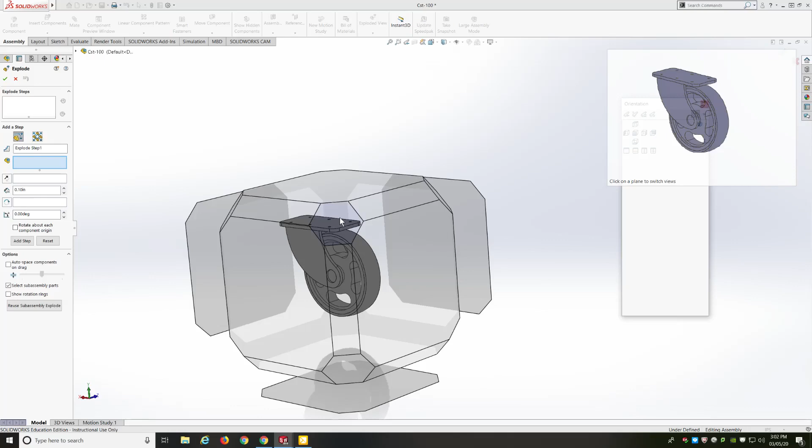Now, before you start exploding, the one thing you should do is hit the space bar and put it in an appropriate isometric view. If you don't put it in an isometric view, you're not going to know exactly what the spacing looks like when you put this on paper. We're preparing this for paper in an isometric view because that's the view SOLIDWORKS uses to show or explain an exploded state. So you have to put it in an isometric view to begin.

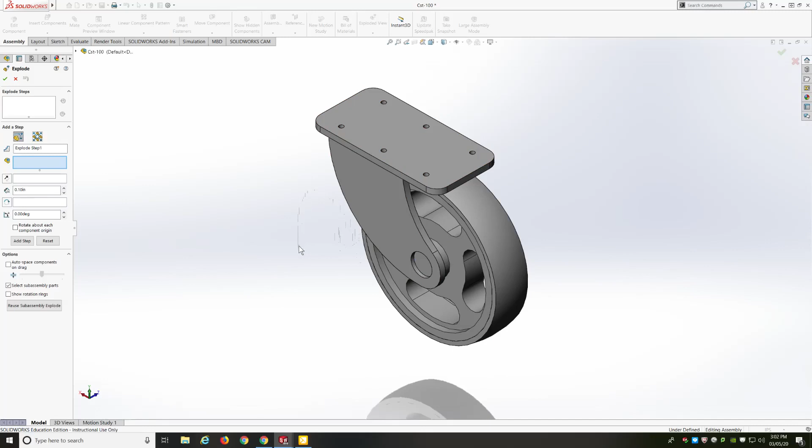All right, I'm going to zoom out a little bit. And basically the way this works is you have to be very careful because SOLIDWORKS will easily kick you out of explode mode. So you have to pay attention to what's going on the left side here to see if it kicks you out or not, based on any additional clicks or a wrong move or something like that.

So how do we explode this? All right, I'm going to left click once, and that will highlight my mount plate, and then it gives me arrows that I can then grab, and it highlights, and I can move it in that particular direction.

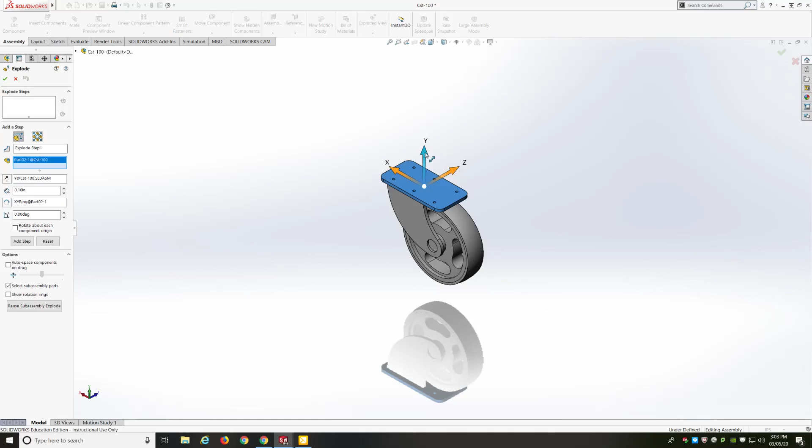So I can grab it in the Z, I can move it in the Y, I can move it in the X direction. In this case, I'm going to grab the Y arrowhead, left click and hold, and drag upwards. Let go. Okay.

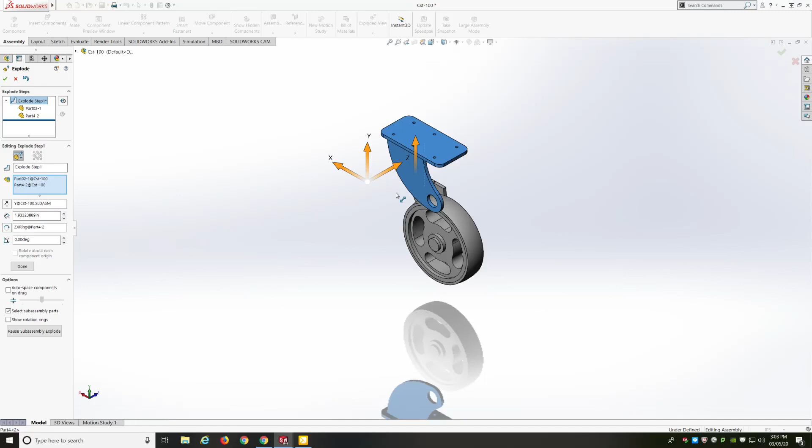After that, I'm going to grab the left. Whoops, that wasn't supposed to happen. See, it likes to do weird things. I'm going to Control Z, undo. And let's try this again. I'm going to left click. Nope, Control Z. Okay, let me left click out in space. That doesn't do anything. Let me undo.

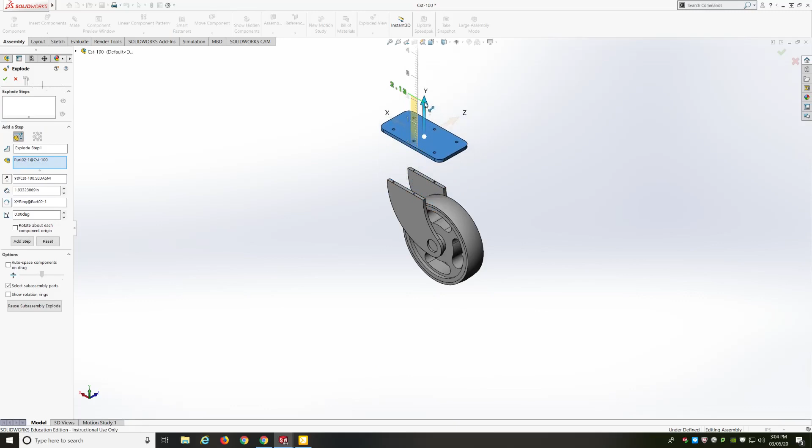Try it one more time. Pull this up. I'm not going to move my mouse. I'm going to right click. That's better. Okay, so we got to make sure that after each step we right click and don't move our mouse.

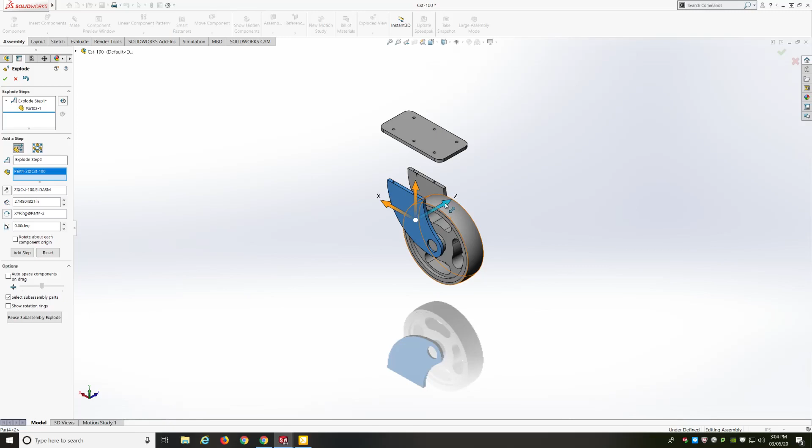So I'm going to left click to select my side mount, and I want to move it in the negative Z direction. So I'm going to left click on the Z arrowhead, and I'm going to move it out. I'm not going to move my mouse, and I'm going to right click.

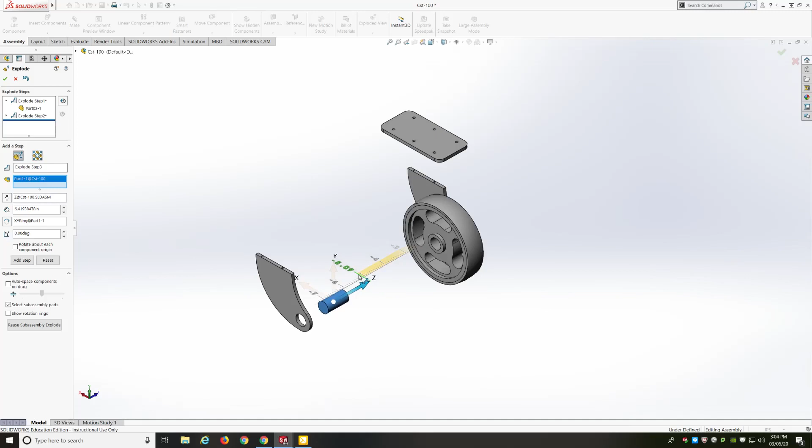Then I'm going to take the axle, and same thing, move the Z axis in the negative direction, and I want to space it so there's a little bit of a gap in between each item. Right click. Then the wheel. Move it in the negative Z, making sure that there's a little bit of space. Right click to confirm. Okay, there's a little bit of space between here and the edge.

I'm going to move this in a positive Z.

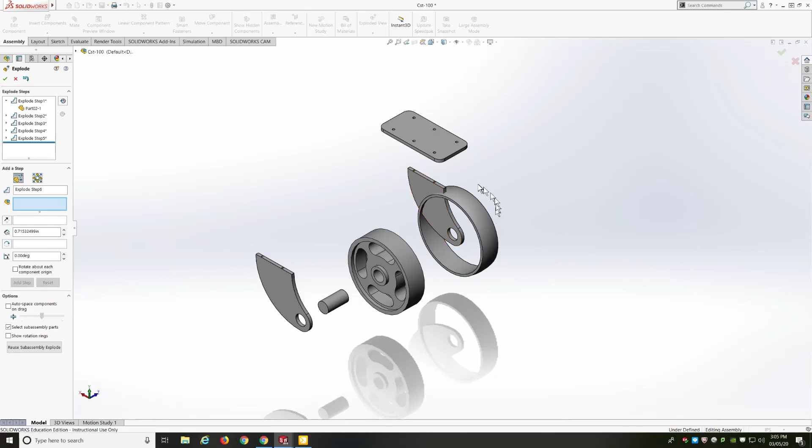Okay, I know it's cutting through that side plate. That's okay. I'm going to right click to confirm, and then select that side mount plate and move it in a positive Z to make sure it's away from everything else. Right click... well, this time I'm getting this kind of box because I moved my mouse. So I'm just going to click OK.

What happened now is it kicked me out. I can tell by looking at this. When it kicks you out and you try to go back into the exploded view, you're basically going to be creating a new configuration. So this is where you have to be careful, and the way to remedy this... I'm almost 100% good with this. I would like to move my side plate maybe back over and then up a little bit.

But this is looking pretty decent. So what I'm going to do is go over to the feature management tree, and there's a series of little tabs we haven't really played around with before. The third tab is the configuration manager. If I click on it, we have my assembly configuration and then a default. If I hit the drop down for default, it gives me the exploded view configuration.

A double left click on exploded view brings my configuration back to the assembly view. If I double left click on the gray exploded view 1, then it explodes it based on the steps I took to explode. So one more time, double left click brings it together, double left click in the same spot gives me the exploded view.

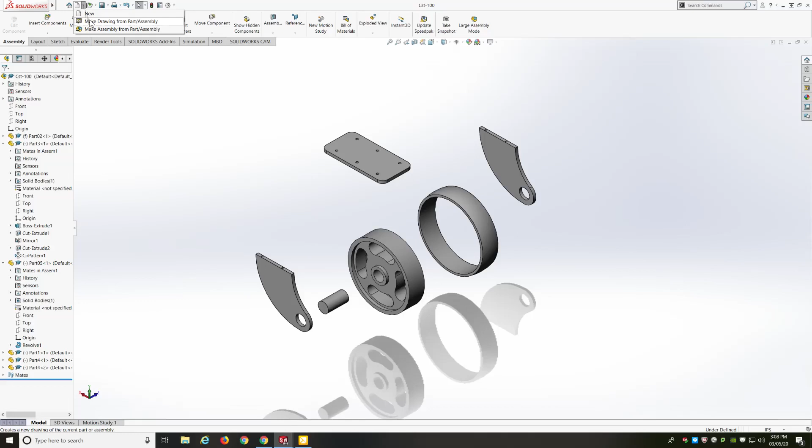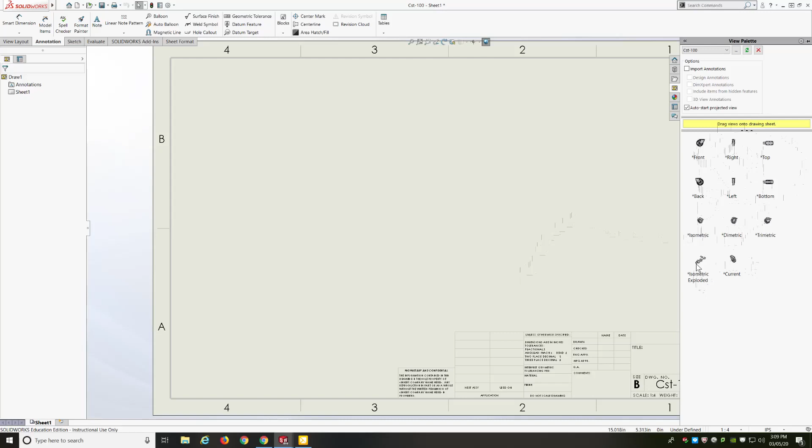Just like starting a regular drawing detail, I'm going to go up to New, make drawing from part or assembly, just like we did with regular parts. It's telling me about the templates, I'm going to hit OK. B, landscape. Okay, and in my palette view, we can see that there is the assembled view, right? The assembly front, the right, the top, the bottom, isometric views, a current view, and an isometric exploded view in my isometric setting.

So I'm going to use the isometric assembled view, pull that out. I'll pull it out right here. I'm going to go back into my view palette and choose the exploded isometric view and let go.

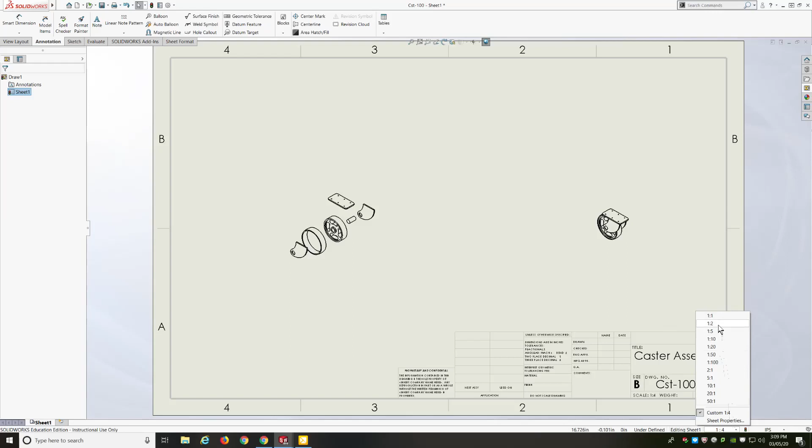At this point, I'm going to change the scale of the sheet. So I'm going to left click an empty space. Shortcut version is down at the very bottom. I'm going to change this to 1:2. See how big it gets. 1:1 maybe. Okay, might be a little cramped at 1:1.

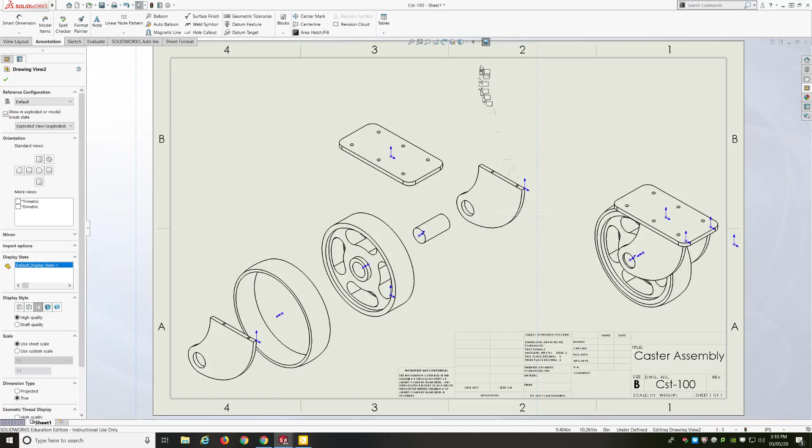Let's see, make sure I grab the right box. Okay, so I think with the amount of parts, this might work out well. I want to again make sure that all of these little origin points are hidden. So I'm going to click on the little eyeball, select View Origins, and turn that off.

The next thing I'm going to do is select the isometric view, and I'm going to change it to maybe the colored version, just to make a noticeable difference between the two files. The exploded assembly view should always be in a line drawing or hidden line invisible. This is a good view. It should never be colored, because we want to make sure we see all the different parts.

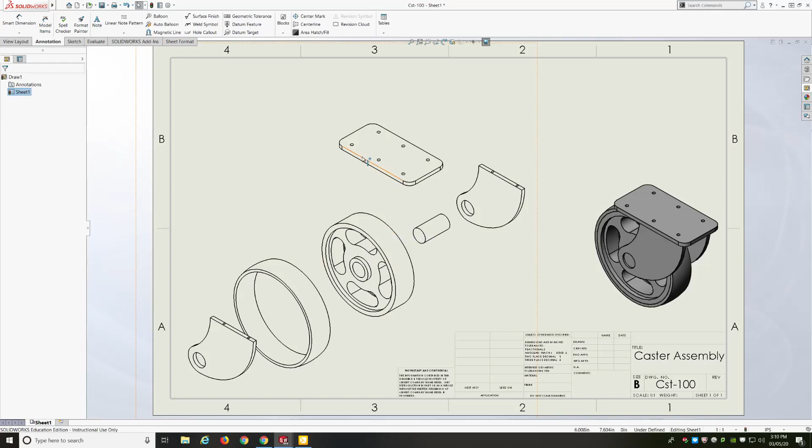So the next step is to create balloons. Up in the annotation portion of the drawing file, I'm going to create a balloon.

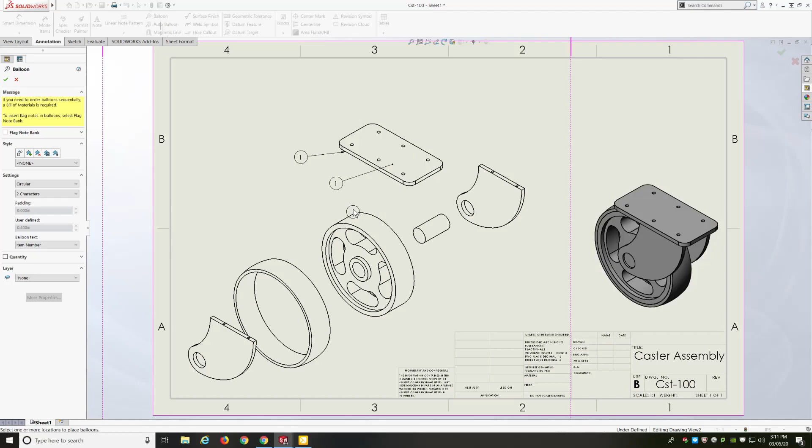And the balloons, you'll notice that if I touch the edge, it gives me an arrowhead. And then I'm going to drag away, left click to place a number. It's going to number these automatically based on the order that they were brought into the assembly file. You'll also notice that if I hover over the face and put in a balloon, you can see there's a difference in what the arrowheads do.

If you select an edge, it gives you an arrowhead. If you select a face, it'll give you a dot. That is per standard. So I'm going to finish. I'll erase one of these in a moment, but I'm going to continue on.

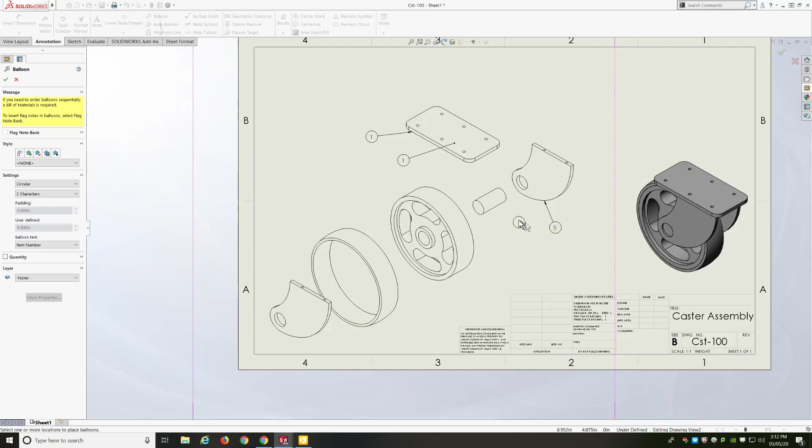By selecting the face here. I'll change that in a moment, that one should have been an edge rather than a face. Do face here, do the face there, and finally do the face there. So I'm going to right click to finish.

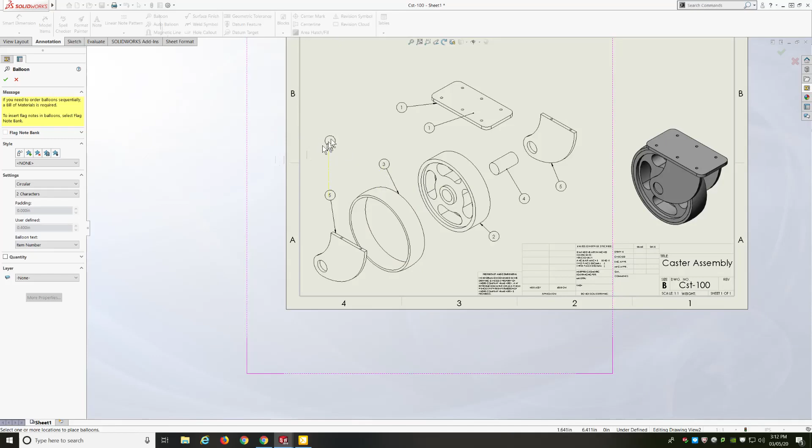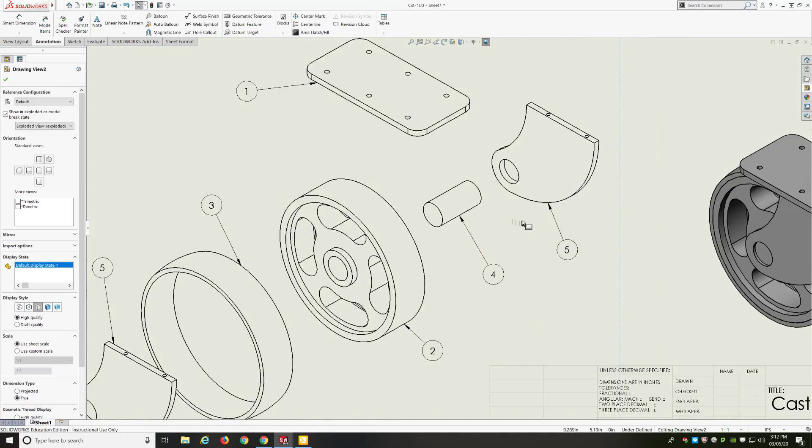Green check out of balloon. Now I can go back in, choose whatever balloon I want, hit delete, and then also select those little endpoints and make any readjustments if I need to. So this automatically changed from a dot to an arrowhead, and I have all my parts labeled.

The last part is to be able to create a table. So I'm going to go to tables, and I want to create a bill of materials. I'm going to select bill of materials, and it gives me a little warning saying select the drawing view to specify the model for creating the bill of materials. So I'm going to left click on this view. Once I do that, it gives me a whole bunch of options.

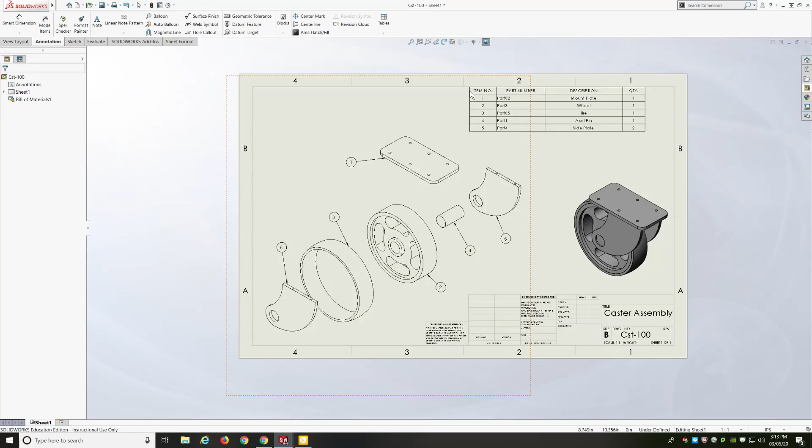I don't have to worry about anything, I'm just going to green check, and attached to my mouse when I move over my view will be a bill of materials. So I'm going to bring it up until it snaps to the top line, left click to place it.

You'll see that the item numbers, item number 1, 2, 3, 4, 5, match what these are. So item number 1 is my mount plate. Item number 1, I have it labeled as part 02, and the description is a mount plate. All of that automatically comes in. The side plate, you'll notice it automatically recognizes that there are 2 of those.

Now, one thing that's missing in an actual drawing, I would probably still like to include materials. So we can right-click in the headers, and we could insert a column to the right or to the left. I'm going to throw it into the right.

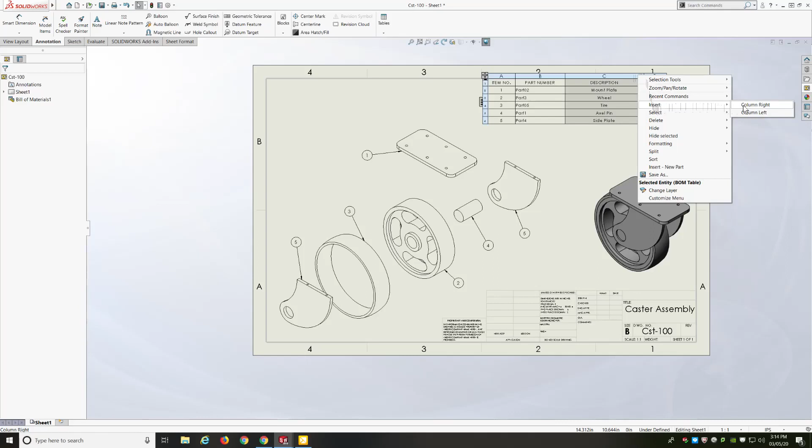We do have some options for custom property names or some other information, and it's looking at a lot of these automated links. Much of that we don't really have defined. So I'm going to try to just put in there.

Just left click out of it, double click in the cell, make sure I do it in all caps, and put in materials. At that point I can readjust my bill of materials. And then this I could fill in automatically by double left clicking into the cell, and whatever material was made for that part, I can do that.

Same thing with the column headers, like letter B. I want to make sure that this is center justified, make sure that everything is nice and neat. And just like using Excel, we can modify some of the information here so that we don't take up as much space with all of this information.

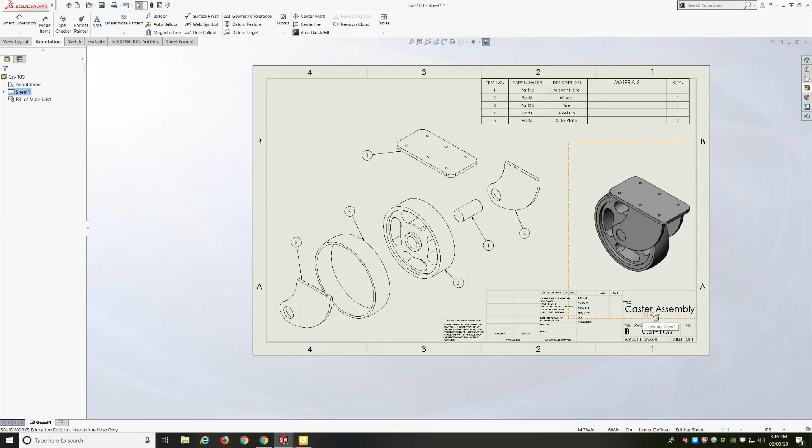After you complete this, this is what you're going to print out. You'll realize that your drawing number and caster assembly from the description of your assembly file is saved in the title block. This is what you're going to print out for an exploded assembly and assembly file.